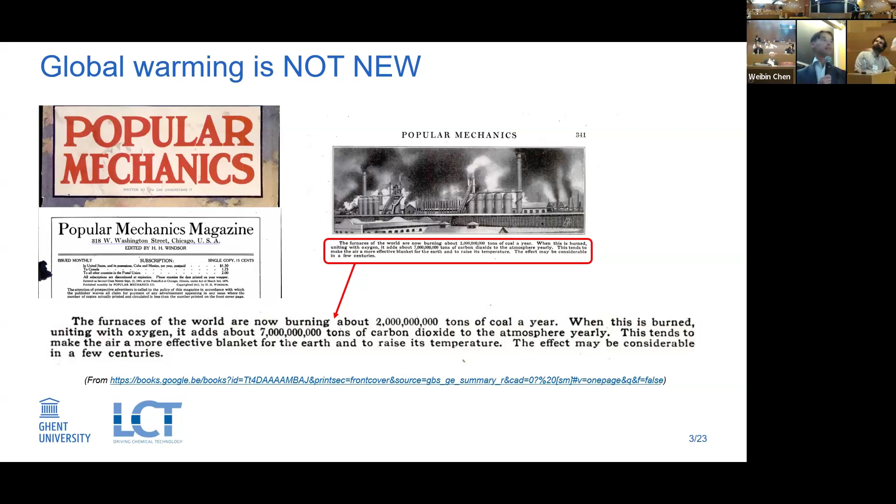I will start with a general introduction, and first I want to start with this slide. This is an article from a certain period, and it deals with emissions of coal, a lot of tons and so on, and speaks about temperature rise. Now I want you to guess from which year this is. Anybody? 1912.

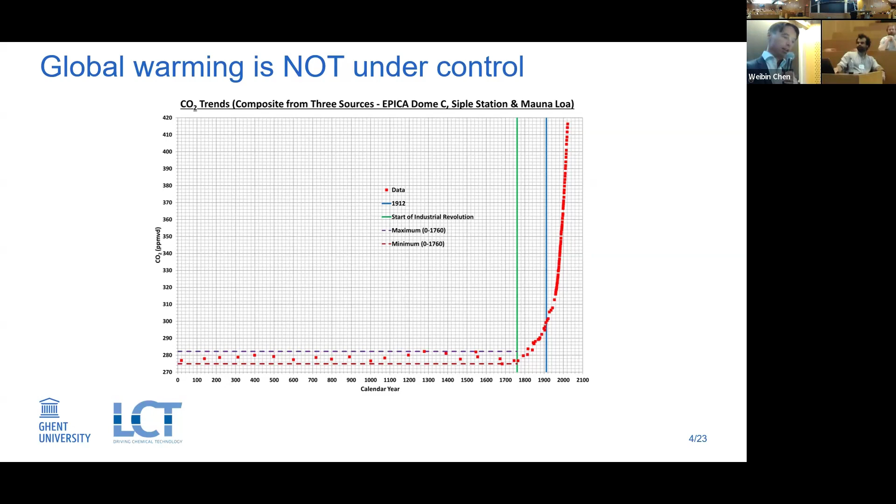So it's not new. People were aware, even in 1912, you can see it with the blue line. So we always keep on saying this is new and so on. Well, as scientists, we keep on reinventing wheels, and maybe also here. But it's clear that we have to do something.

Why steam cracking? Why petrochemicals? It's the biggest chemical process for producing plastics. It produces ethylene, propylene, but also aromatics, butadiene, and so on. It's the main workhorse of the petrochemical industry.

It also results in 250 million tons of CO2, but that's even an underestimation because it doesn't account for scope 3 emissions, and I will discuss that a bit later. You can use a large number of starting materials. Most popular are ethane and naphtha, but you can basically put also vacuum gas oils or plastic waste derived oils and many other things in the steam cracker.

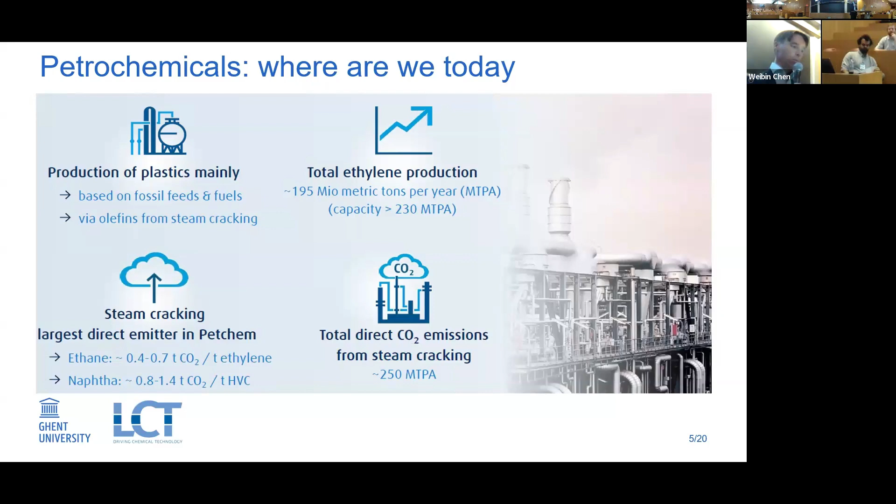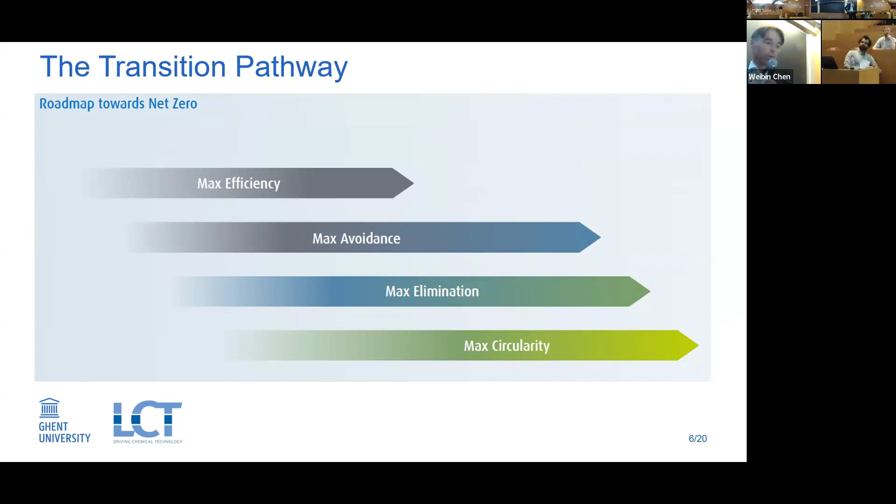So these 250 million tons or more are basically the reason why we want to reduce this and why we want to come up with a better process. The logical step, of course: we maximize efficiency, we try to avoid it, or we go for circularity. I will discuss all these different aspects in this talk.

The good thing about the steam cracker is that approximately 90% of the emissions come from the furnace in a modern plant. The base case on the left is A. Here you see a steam cracking furnace, in this case fed with propane. It's a real furnace from Dow, benchmarked, and so on. So what happens is you put propane in, high temperatures, you have a convection section on your left.

Convection section here preheats the feed, goes to about 650 degrees, you start cracking up to 850 degrees here, then you cool very quickly. This is to avoid side reactions of the ethylene and propylene, and at the same time produce high pressure steam. So this is the base case that I will be studying and comparing with other types of cases.

This is a new invention by Technip Energies. Here they maximize the efficiency of this radiative part, so more heat is basically going to the coils. Typically radiant efficiency is around 40%, here they went to 55%.

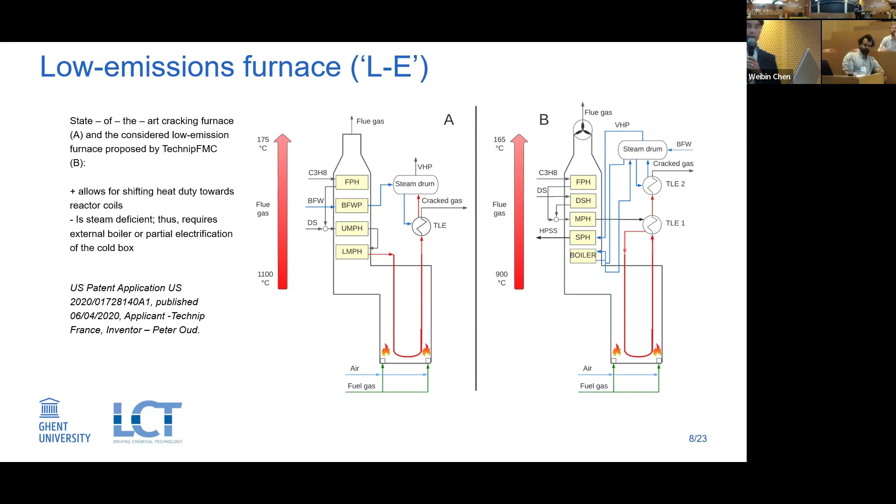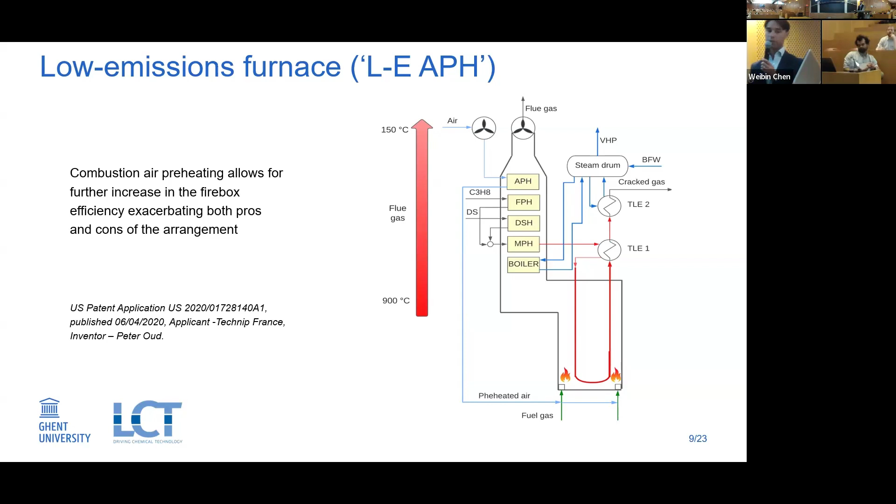This of course means that you can't recover this heat here, so you need tricks to make the steam and also to preheat sometimes your feed. So in this case you have 2 TLEs. You can also do air preheat. With air preheat, you can further improve the efficiency of this radiant box that basically provides the high temperature heat here. This can also have an effect on the overall efficiency, but also on your emissions. And these are all patents that are recently used.

Then we go to something completely novel. I've been working now for almost a decade with a company called Coolbrook. Coolbrook invented in the end the worst compressor ever - it doesn't compress anything, it just transforms all rotational energy into heat.

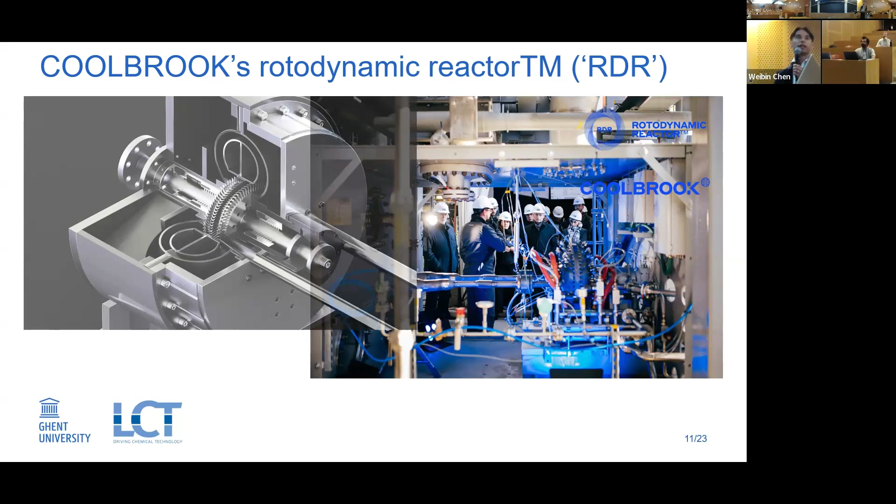And the advantage, of course, is that a compressor you can electrify - not needed, but it's possible. And this is actually what's happening in this machine. You say that's impossible, you will not use a rotational machine to crack hydrocarbons. Yes, it's possible - it's built, it's operated, and on a relatively large scale. So it's not impossible.

How does it work? You basically come in on the sides at high velocities. The center part, the rotor, is rotating at 40,000 RPM, very fast. Basically what it does is it's accelerated by this rotor, and then it hits the diffuser, but at a very low angle. So what happens is all this velocity, all this energy is transformed into entropy loss and transformed into heat.

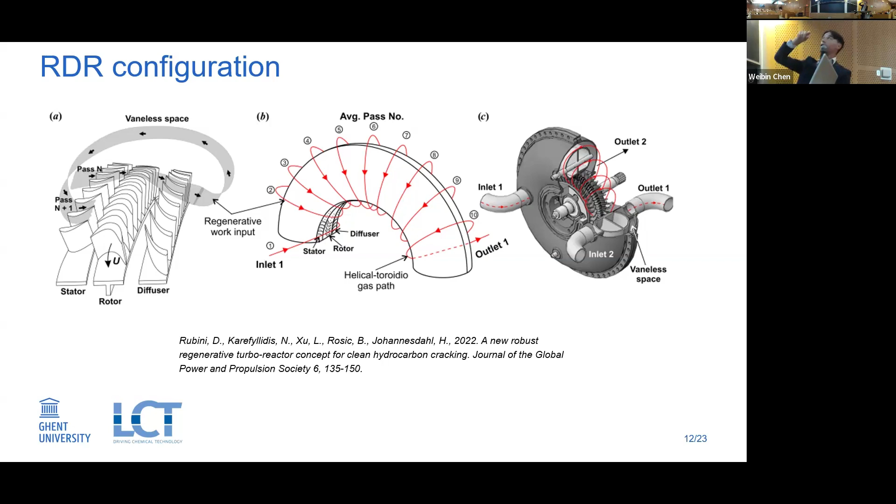Again, worst compressor ever—you don't have any pressure buildup in the steam cracker you want to have. And what they do with Coolbrook, they make this kind of donut design. So you see the funnel going in a donut shape from inlet to outlet, and in this case out in the top, 2 inlets or 2 outlets, and so on.

The good thing about this machine is that it actually results in some selectivity increases, so yield increases if you crack propane, for example. You see a difference of 4%. Then you say 4%, that's small—but in the steam cracking world, that's enormous. Increasing the yield by 0.1 weight percent for a typical cracker results in at least €1 million extra profit. If you go 4 weight percent, this means 40 million euro or dollar.

We have recently invented in Ghent, and it's now patented so I can say it, one which goes to 15 weight percent. That's 150 million euro.

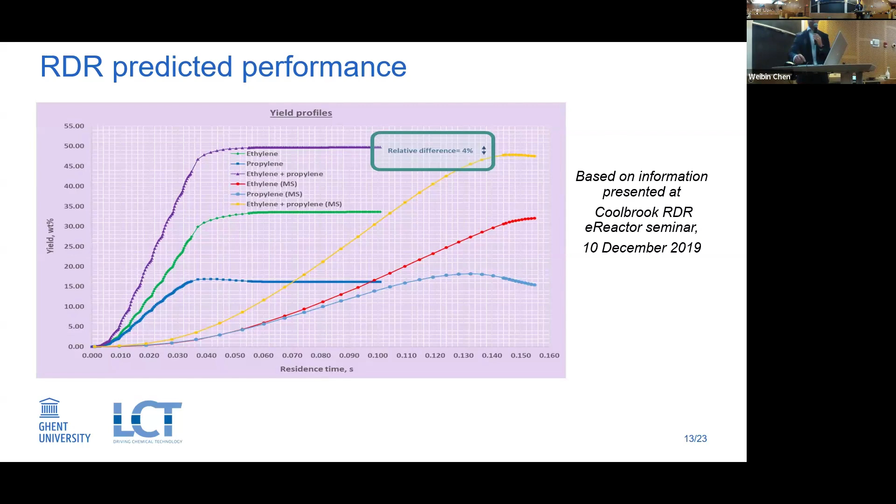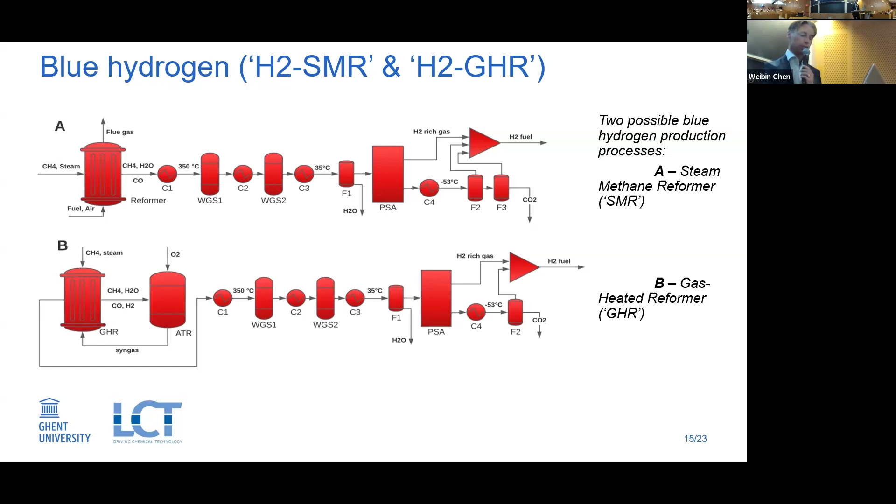And this is also what I like about the talk this morning: will we put these steam crackers in the same place as where they are now?

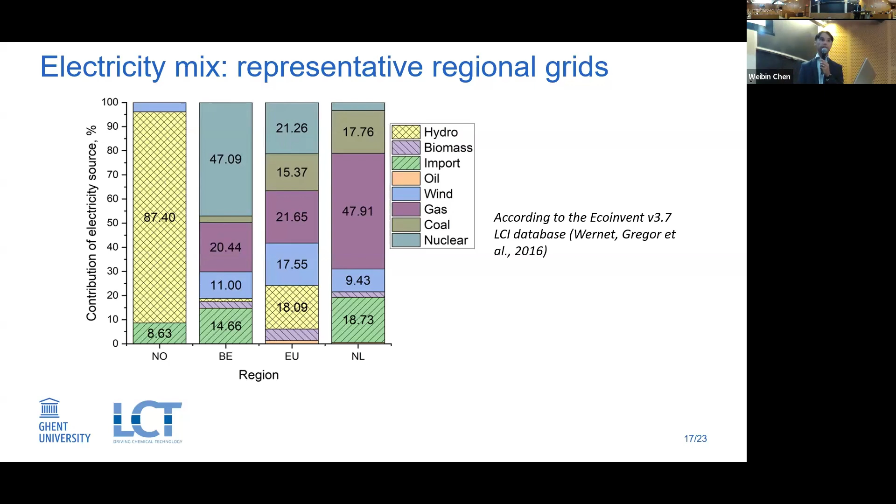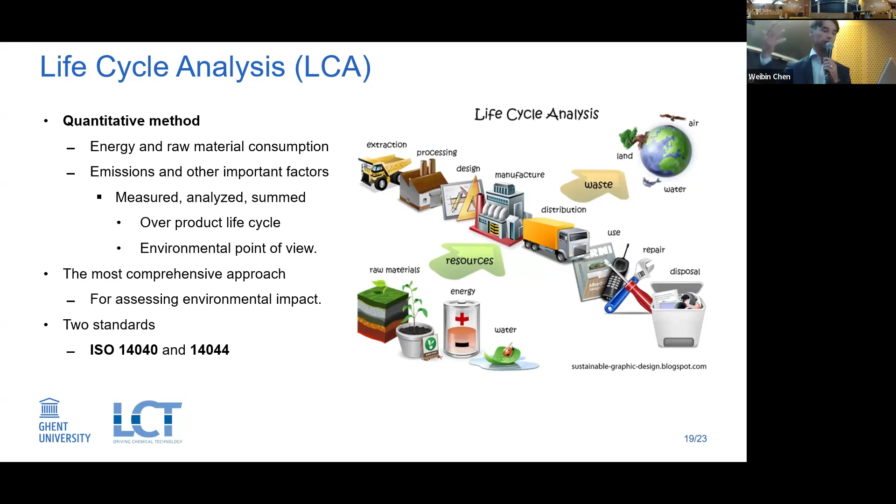So what we do with an LCA—an LCA is in the end a complex word to look at, but for me it's mass and energy balances and then some post-processing. So what we did is, of course, use our detailed simulator. During my PhD, I invented a simulation tool for simulating steam cracking furnaces. On the other hand, you have to simulate the whole separation train investment and so on, and use that for the energy and raw material balance. And then you do the post-processing with Ecoinvent and all these data, and you come up with numbers.

Then, of course, with any LCA, you have to decide cradle-to-gate or cradle-to-grave. In this case I did cradle-to-gate because it's just too difficult to do cradle-to-grave for anything related to petrochemistry—what will you be using to compare, and remanufacture, closed-loop recycling and so on.

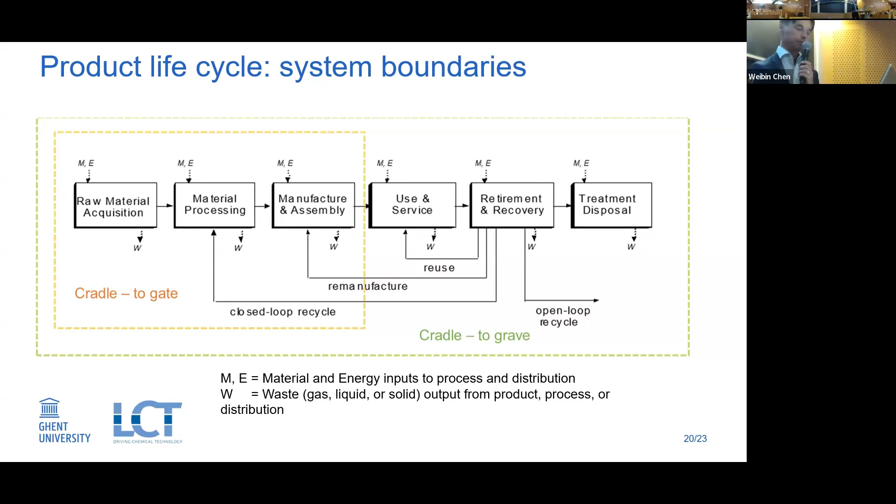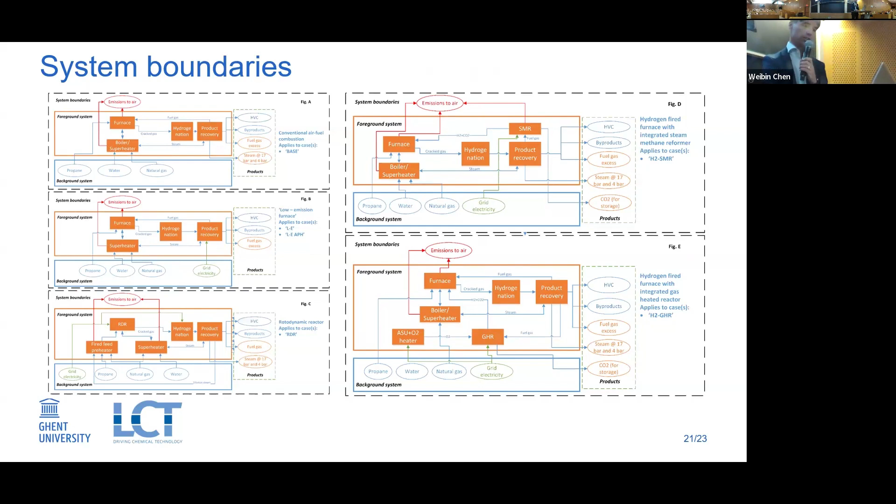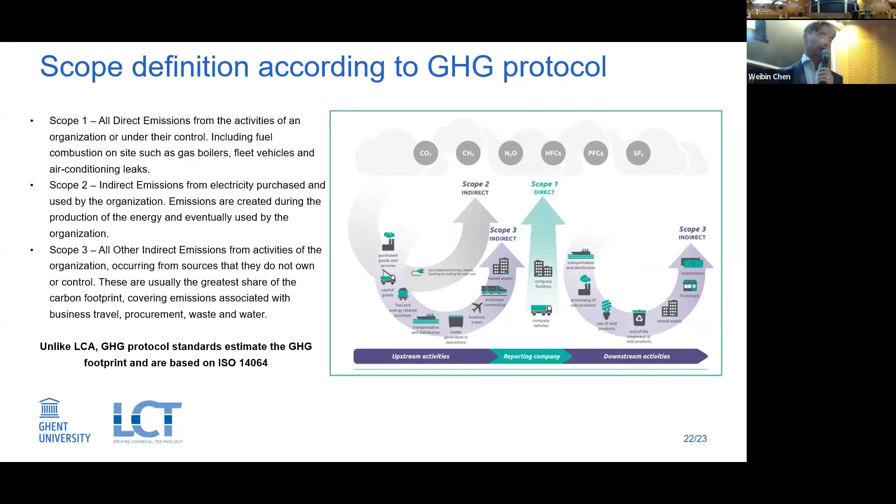Of course, for me it's always easier to reason in scope emissions—scope 1, scope 2, and scope 3. Scope 1 is related to what happens inside the plant. Scope 2 is related to utilities, mostly electricity used in that plant. Then you have scope 3, which are the emissions related to transporting that feedstock into the chemical plant. Not surprisingly, typically scope 3 is the largest for a chemical cracking plant.

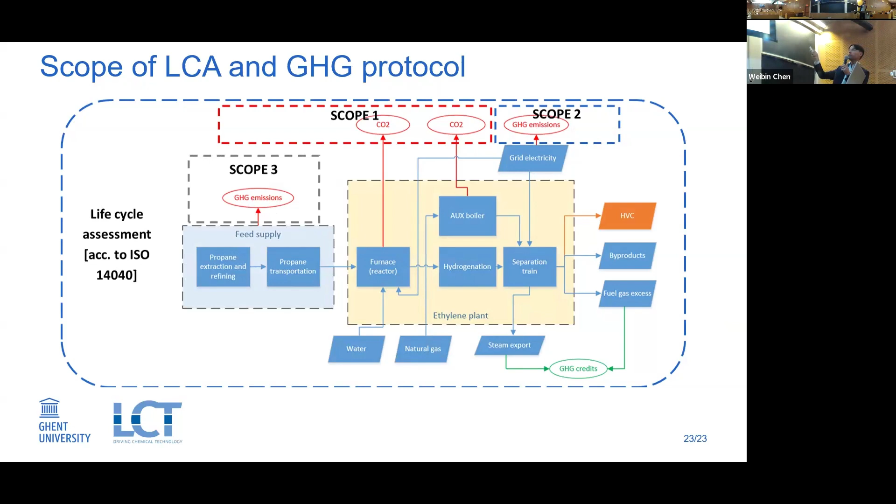For a steam cracker, it looks like this: the main CO2 emissions from the scope 1 point of view come from the furnace. You also have some other emissions which can come from boilers. Then you have scope 2 from electricity. Then we have scope 3 related to the feed supply.

So some results—yeah, this is a lot of data. Let's start with the hydrogen case. If you have something in red, we export it, so it's a negative value. Here we produce fuel gas and export it. We also produce some steam here, so it's also exported, a negative value. Then we have some direct emissions, which is of course higher for the steam methane reformer case.

We have the propane upstream, which is in the end the scope 3 emissions—you need a certain amount of feedstock to get a certain selectivity. Then utility boilers that we have, and grid electricity. So this means you end up with these values: 1.5, 1.7, and so on. And what you see is that we basically have the largest value for the electrified reactor.

But also the smallest value. And again, it's all crucial where you put these facilities. If you put them in the Netherlands, you're actually a lot worse off compared to the current state of the art, the base case, which is 1.85. But if you put them in Norway, then of course you're a lot better. If you look at, for example, a low emission type of furnace, that can also help substantially. But again, there you can also have an effect of the location.

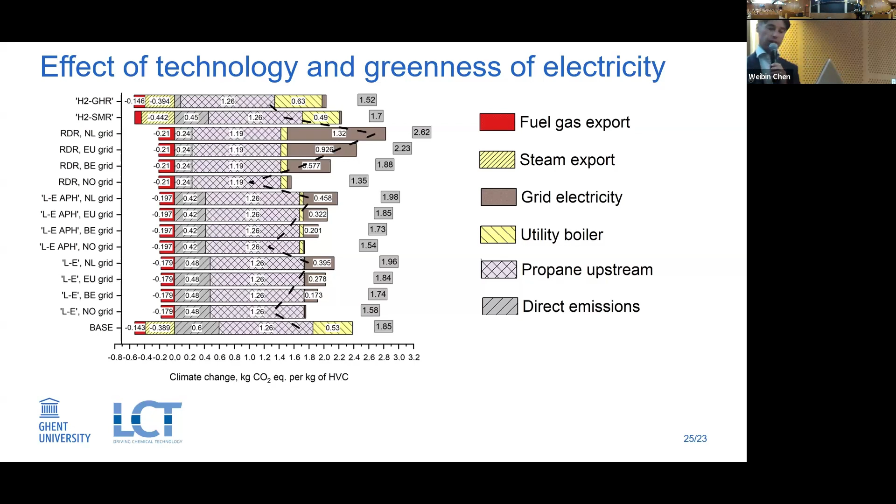If you look at the other cases, it's somewhere in between. So let's try to understand it a bit better, and then we zoom in. So you see here the base case, so also auxiliary heat direct emissions. And then you see the grid electricity is actually one of the main contributors.

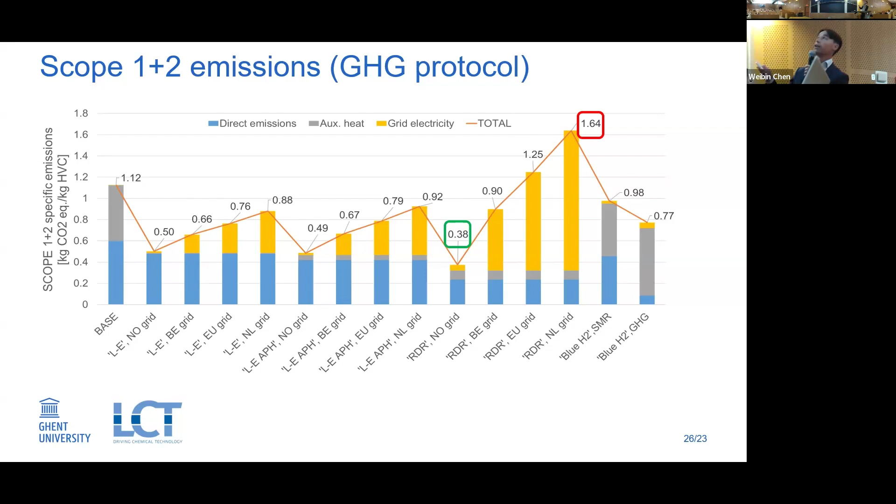And this of course explains why electrification can be a good thing, but also a bad thing. This is something people basically underestimate. The RDR also has a very low footprint, but for a different reason. It's the only technology which actually results in a selectivity improvement.

So you get more—this is designed for 1 million tons of ethylene production. Because it has higher selectivity to the desired products, you need less feed. This results in a drastic reduction of the scope 3 emissions.

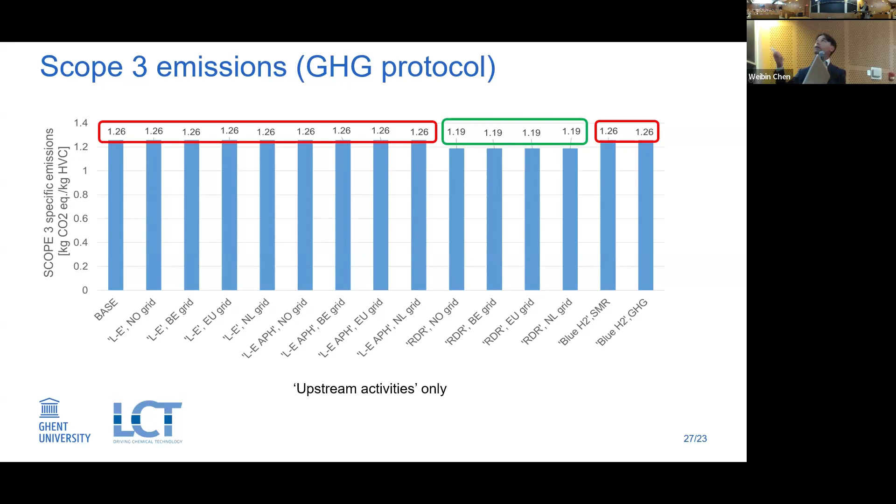Of course, what does it mean? If you would go with an alternative feedstock—which is what we're currently doing together with, among others, the Shell group—we'll no longer use propane, but plastic waste derived oils. These have a scope 3 emission of zero, so you can really see that we drastically reduce the footprint.

So in the end, the electricity grid is important. Electrifying can be a good thing, but you also have to work on your scope 3 emissions, because they are basically the most important factor.

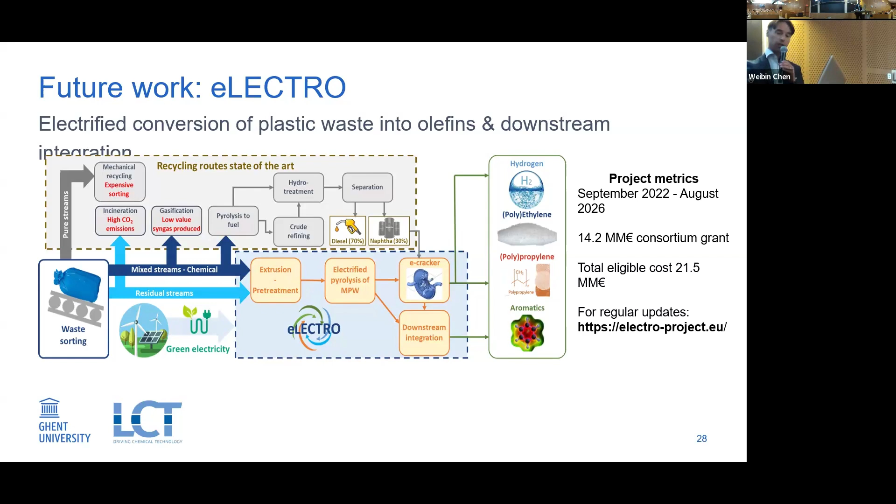So the RDR, it works—it has been demonstrated this year. Selectivities have been confirmed and presented at the Ethylene Producers Conference. Low emission furnace is, I think, a very good step in between—you can transform a furnace in a relatively straightforward way and use your existing facilities. Blue hydrogen can also be an option, but today there's quite some controversy around blue hydrogen, especially in Europe, so it's not advisable.

Well, so this brings me to the end of my talk. I hope you enjoyed it. Thank you.

I may have missed this, so pardon me if I misunderstood—are you doing direct methane to hydrogen production with high temperature pyrolysis of carbon? No. And the second question: have you thought about doing that particular process, which of course gets you a solid and a gas?

Yes, so I'm working on that with the largest chemical company in the world. Indeed, it's a very interesting option. Of course there are a lot of different technologies to do that, and none of them are great. I think I've selected at least the best one, I would say. In this context, we're looking at electrothermal fluidized bed.

Yeah, and that's something quite novel. But of course, the material that you have as catalyst or as conductor is challenging. But the key thing, if you look at economics, is to make a carbon that has value—otherwise it becomes very difficult. If you just use hydrogen, economically it's difficult. You need to have a carbon which has value.